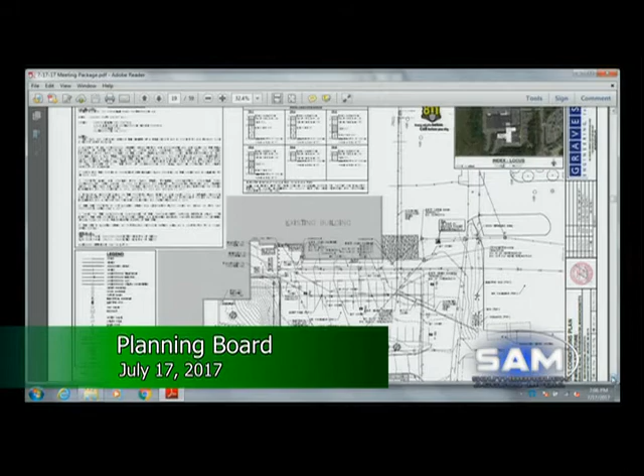As I mentioned at the first hearing, we were proposing a small increase of 1,320 square feet. Subtracting that, now we have an even lesser increase of 820 square feet on the site. Again, when looking at this in terms of stormwater, even for the 100-year storm, that's about 2/10 of a CFS. So it's a drop in the bucket. And the 2-year storm is almost zero. So this increase is pretty negligible. I think Fuss and O'Neill agrees with that.

Also, we looked at areas that we could add some landscaping to the site or habitat plantings, as was mentioned. There aren't really any wetland systems around the site that we can enhance. I didn't notice any invasive species that we can clean up. And we did not have any landscaping adjacent to the garage before because of its proximity to the structure itself. So we identified an area, currently just lawn, between where the parking garage will be and an employee parking lot, that we're going to plant some trees and shrubs. There's nothing there now really at all, so we'll be introducing some plantings there.

So those were the 2 plan changes. The final comment that Fuss and O'Neill had that was sort of outstanding was with regard to some existing lights that should be added to the photometric plan. These lights sit on an existing retaining wall on top of the wall and face down towards a parking lot to illuminate the face of the wall, so trucks don't back into it.

They're, I don't know how many watts they are. They're very small. They don't illuminate the sky at all. Frankly, I think they're going to be removed once this project starts anyway. It has no impact on the photometrics for the site or the project at all. So we don't feel that's really necessary to add that since they might be removed anyway.

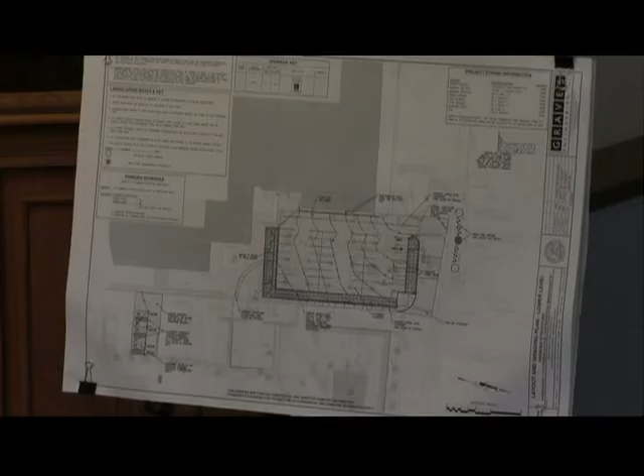So that's all the comments, that's the plan changes. If anyone would like me to go into any more detail about any of the changes or responses, I'd be happy to do so, or answer any more questions.

Great, thank you. I'll open it up to the board. Mr. Mills?

So I'm gonna go back to the lights, because I know it was a big discussion when we originally approved this new layout for the parking that's there. And I think it was my comment specifically, we didn't want it to light up and be very obvious from the road, and wanted it to remain discreet to where it is.

I'm not saying we have to have a whole plan, but I would like at least something that says the lighting plan will stay in effect to what it currently is. And if there's any change to that, then we'd have a say in the matter.

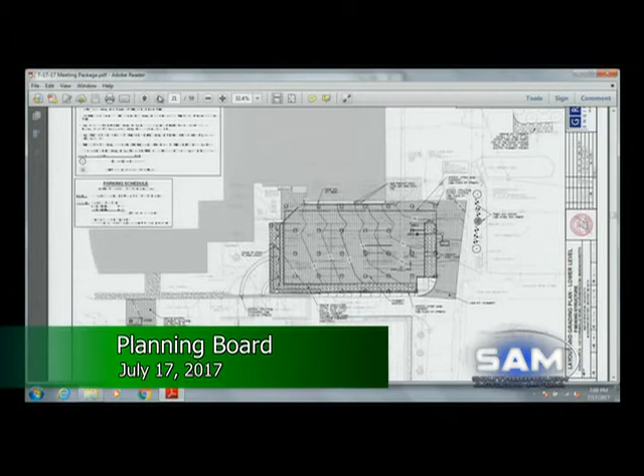Right, so we did submit a photometric plan with the initial submittal, so that represents the lighting created from this project, in addition to what's already there. In the last revision, we submitted cut sheets of what those fixtures look like. They're all LED lights now, down facing, both the lights for the poles on the upper deck and the lights under the roof on the lower deck. So we submitted all that information, and again, all that's reflected on the photometric plan. There's no spillage, there's no real major increases in lighting.

Again, the comment that Fuss and O'Neill had was just about those small landscape lighting-type fixtures, that those should be added, and I don't feel that's really gonna be impactful whatsoever.

No further questions. Mr. Jenks? Good evening. On the lighting, the luminaire data that you did give us seems to cover a whole bunch of different models. Where am I supposed to know which model the manufacturer's data refers to?

Good question. I could have been a little more helpful on that and highlighted the ones that were specified. They are specified on the lighting plan, the photometric plan, which model it is. I should have been a little more helpful for the board and highlighted which one at the height of the poles, but that information is all on the photometric plan that was submitted previously.

So the only way for us to know is go back to that plan and then get the numbers and then look it up on the manufacturer's data? Correct. I don't have the lighting plan with me tonight, but the model number is on the plan. I don't have that sheet with me tonight, though.

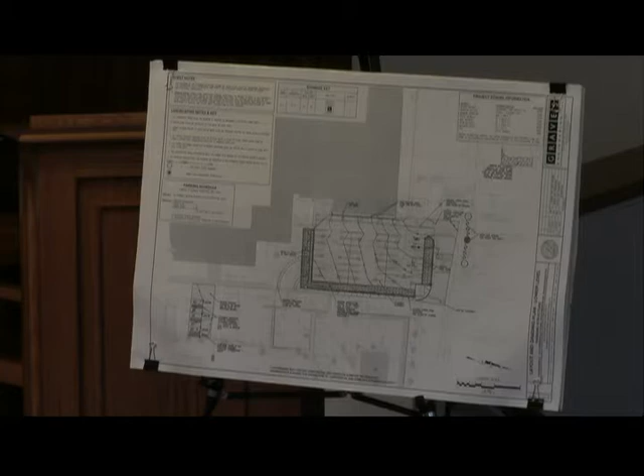Where does it go now? This area just drains to the lower parking lot right now and gets collected by that catch basin system. It'll all still go the same place, we're just diverting it around. We don't want it running into what's now going to be an enclosed area on the lower level. So the volume of water isn't going to change that's coming off this area? Yeah, no, there's no changes to that area.

But it's going - that drain is going to couple into a new drain that takes water off the top deck? No, not the top deck, just this area that's above and adjacent to the structure, this little area right here. So it doesn't tie into a new drain then? It ties into the existing drain system. Okay.

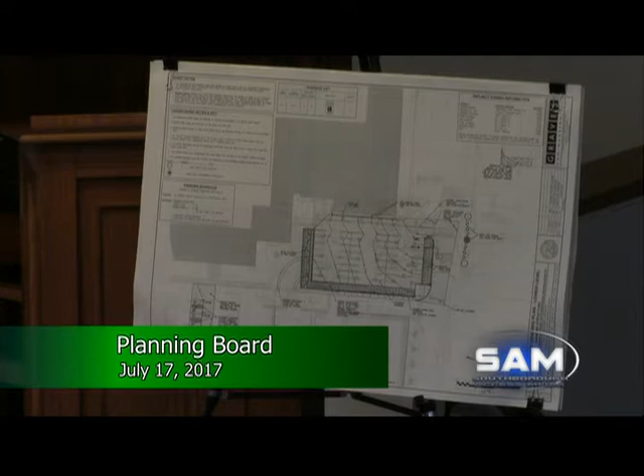Finding that extra 500 feet is a good thing, small, but I understand the constraints of the site. I'll add to that too - I fought for more areas, to be honest with you. There were some areas I thought maybe they could lose, and some of the attendees said no, we really need that, there's nothing there now, but when we get deliveries and stuff. So I really think that's the best that we can do.

No more questions. Thank you.

Mr. Stein: I was away on June 19th, but I did view the meeting and filed the Mullins paperwork, so I'm eligible to participate in the public hearing. My feeling at this point is I would feel more comfortable voting after a more thorough review of the photometrics. My recommendation would be at a subsequent meeting to bring materials to go over the photometrics more thoroughly, because the lights have been reviewed by your consultant, and they had no comments. It was part of the submission package. Those lights, if those are the issue, we'll add in that they'll be removed, because frankly I think they're going to anyway.

I wish I brought a picture of it. It's literally no bigger than an outdoor outlet fixture, with a tiny little light on it. Maybe I'm misunderstanding. Is it Fuss and O'Neill's contention that regarding the lights that were proposed to remain, that weren't in the original photometric plan, there's really no substantive change in the light impact of this project on the area?

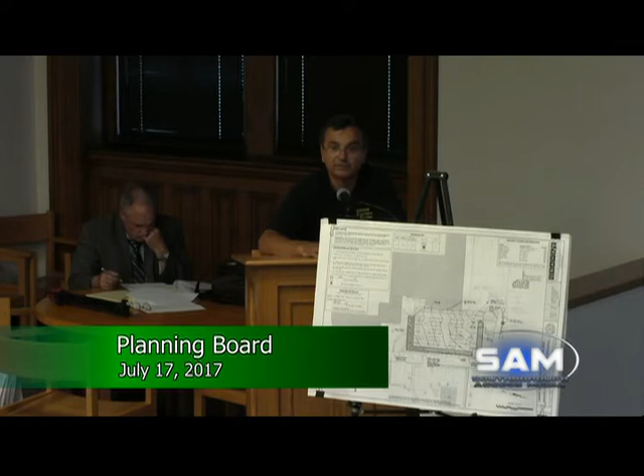So those are my two requests as a neighbor. I know you're spending a lot of money here, and we haven't done a lot of things over the years, and we've lived with the traffic, which is no big deal. It's part of living there. But the lighting is, and the view has changed definitely in the last 10 or 12 years. Could I get your name again? I'm sorry, George Harris. Okay, thank you. Thanks.

George, go back. Can somebody point on the map that area where we want more screening? It's not close to this parking garage. This might be the best view to get it here, so it's quarter of... Why don't you put it up so we all can see what we're talking about?

This is, it's right in this pattern. So here's the building here, right? This is the big building right under the arrow. Right under the arrow, so it's just along here. So where's your house actually? Right there. No, because they own all the property there. Well, they own, it flares out, and then there's a 70-foot lot for Paul Foster, and then I start.

So there's not a lot of wood. You gotta grab a microphone, gentlemen. I'm trying to see it. It's hard to see. This is 85, so it's here. This is 85, right? Yes. It's here, it's along this, there's your back parking lot where all the trucks and the vans and stuff park, and we're right here. We're like maybe 100 feet from the stone wall to the back, to my property.

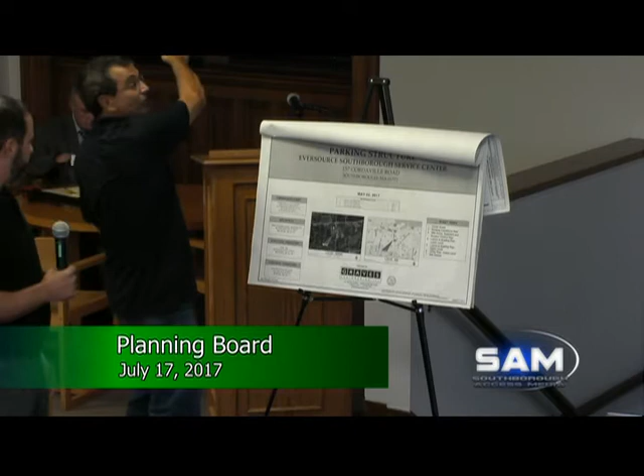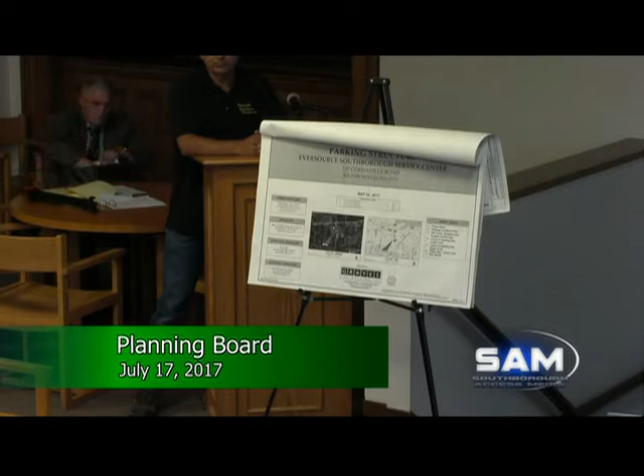Okay, now they know where you are. We're gonna try to get the GIS to zoom in on your lot, George, that way we can all see what we're talking about. This is exactly why we have public hearings, so that the neighbors can be aware of what's going on and provide their comments. And we know that the proponents want to be good neighbors. If there's an opportunity to take care of the neighbor, that's what we're going to do.

Mike, do you have the authority to agree to these type of things tonight? Certainly do not, no. To spend their money, no. Or any client's money, no.

The contractor for the project is here and interested in starting the work. I was just told there's a long-term plan, though I'm not sure of the timing, to replace all the existing sodium lights with LEDs throughout the site. I would think they'd want to do that anyway as part of their improvements program, but I can't comment on the timing.

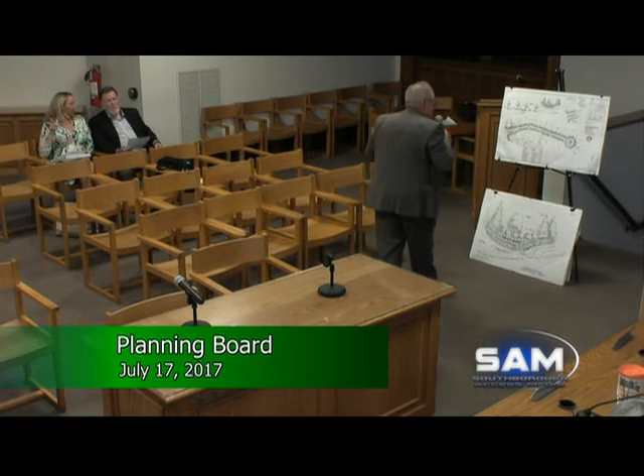For the record, my name is George Connors. I'm an attorney representing... hold on one second, George. Do we need...

Mr. Chairman, just as a point of clarity, because of the Mullin rule, and I missed a couple of meetings on this, I am unable to vote on this matter, so I am going to step away. Thank you, Mr. Mills. I'll ask the town planner to update us on the progress with this proposal. Karina?

Is he technically recused, or just, is Andy recused, or just not part of it? Not present. Did you already say when they continued? Yep. Okay, just the progress.

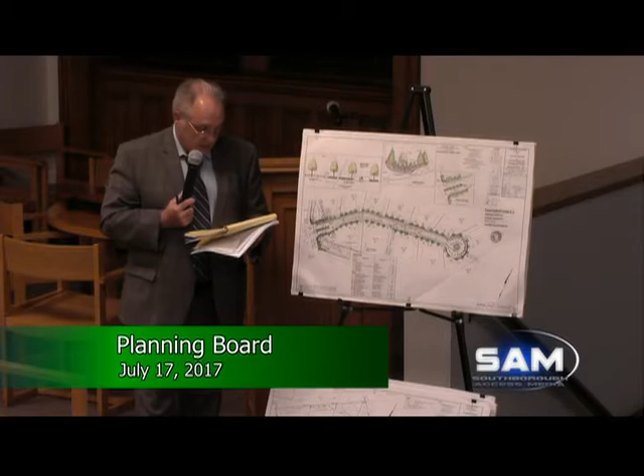We had indicated in a letter some of the LID components, highlighting those particular aspects. As I said at the last meeting, our drainage system acts as an LID in terms of infiltration. This is a large basin here, and we have an infiltration trench in this location, with water ending up going off in that direction. All of our stormwater is generally managed in this direction, ultimately flowing down along to this location and into this location. There was never any discharge onto an abutting property here—it infiltrated into the ground. There was an area in that location that had been mined out and filled with an odd, impervious material, which is why there was some ponding at that location over several years in the past.

That material will be removed. Underlying the site is sand and gravel, very deep, and it perks very well. So this basin, these infiltration trenches, and stormwater conveyances will infiltrate the entirety of the 100-year storm—all storms up to and including the 100-year storm.

The only thing we're still out of sync on is a road name. There were several road names we proposed to the developer, but he has not yet chosen one. I don't think that's a big issue—we'll come up with one that's acceptable.

So I can respond to questions, comments, and suggestions at this particular point.

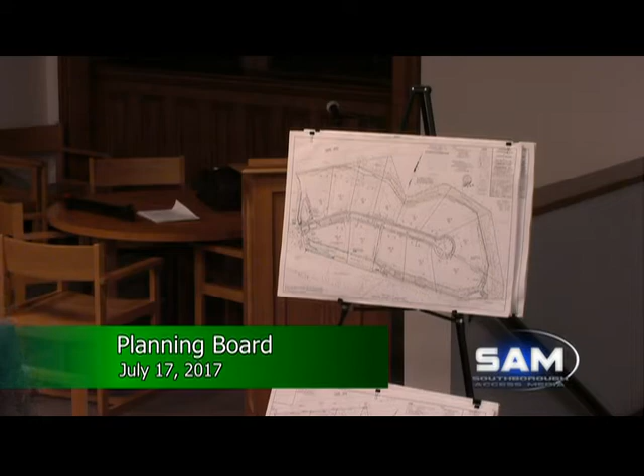Open it up to the board. Mr. Jenks? Yes.

Good evening, George. Who is, I haven't seen the actual application, but who is the owner of the property? The owner is the Johnson Campbell Realty Trust. They live in town, one of them lives in town.

And you are representing them, is that? I'm representing Habitat, the builder, the developer. And they're not represented in this at all? Habitat? No, the Johnson Trust.

Grab a microphone, go up to the... My name is Marshall Gould. I'm an attorney in Worcester, and I represent Johnson Campbell Realty Trust. We've been very aware of what they've been doing from the time of the purchase and sale agreement all the way through this time. Thank you.

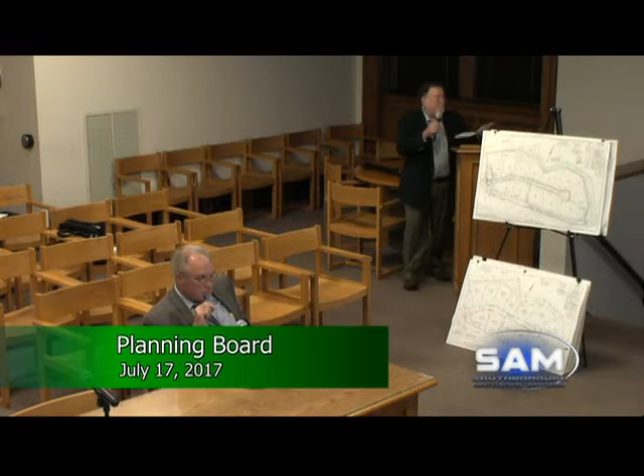The modern wonders of technology, I've lost my notes. Can you bounce ahead? Sure, to, Mr. Stein.

Mr. Connors, have you read the July 11th letter from the Open Space Commission? I have, yes, I have. Okay. Can you just take me through the difference between what the Open Space Commission is recommending and your current plan?

The open space is talking about, in not any particular order, the 81U, a lot would be set aside under one of the provisions of your subdivision code for a period of 3 years. That would be one of the larger lots in the site as an open space area. In addition, they talk about the plan meeting the 10%, but in some areas, predominantly, let me get it.

Along that line there, it's 10 feet wide, and along this line, along here, it's 10 feet wide, and their recommendation is, or they don't seem to think that has very much value, but I would point out that the entire subdivision, other than the north side where the road is, which is right there, Fisher Street, there's a railroad that runs along there, but all of that land surrounding it is open space, either by a trust, open space trust, or the MWRA. In terms of the open space, it's been reconfigured, and it follows a line.

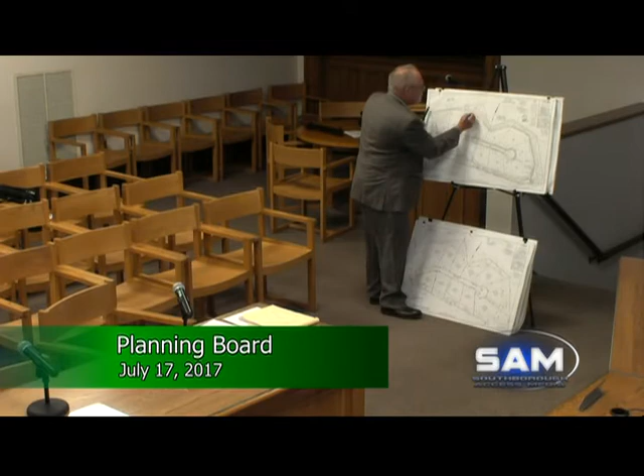I'll have to go up there. It's that yellow line that runs around the property. You can see it going along there. And everything on the outside of that is dedicated as open space in perpetuity. So your plan is essentially that the 10%, yes, is within a ring around the parcel.

Yes. Okay. Freddie, can you speak to the difference from your perspective, please? And it would help, Freddie, if you could actually grab the mic and go show us on the plan.

Hi, I'm Freddie Gillespie, the chair of the Open Space Preservation Commission. First, I have to say, the letter you have from July 11th was from the Open Space Preservation Commission after our meeting, not from me as an individual. That was a prior letter when we couldn't meet for the last meeting. So the letter for July 11th is an official, unanimously voted upon by the commission recommendation. This plan here came to us after our meeting, so we haven't seen it. So I really can't, as a representative of the commission, speak to it.

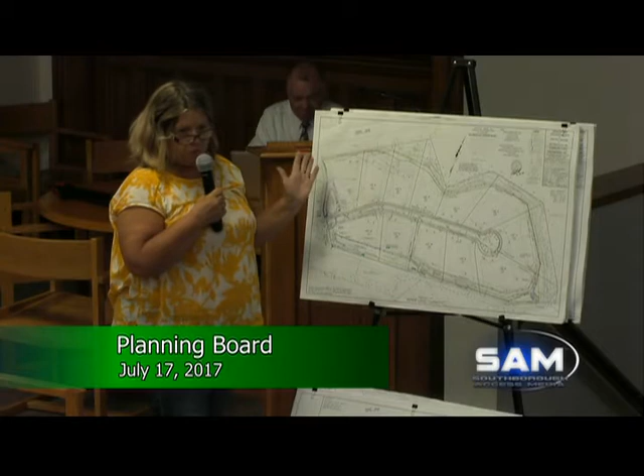So having said that, if I'm interpreting the plan correctly, are the 10-foot strips aligned or bordering other protected open space? Not necessarily. So here, I don't know how deep the upland is to the wetlands, but it's deep, so we didn't bother measuring it. There's a 25-foot no-touch to the wetlands, but along here...

And additionally, there's... Mr. Connors, where Freddie's indicating, what is that open space bordering? That open space along the bottom of that plan on the south side borders the MWRA. I'll tell you exactly - it is actually owned by the entity, the Department of Conservation and Recreation, Division of Water Supply Protection.

We did talk with them on several occasions, because when we were mapping the wetlands in that area, we had to get permission to go on their land to satisfy a conservation restriction. I did talk with MWRA relative to this, and they understood this project is coming in. All the land to the south is what I just said, and the land to the upper right-hand corner, other than where the railroad is, is an open space trust - the Trustees of Reservations. So essentially, other than the railroad and an abutter to the west, the entire site is surrounded by open space.

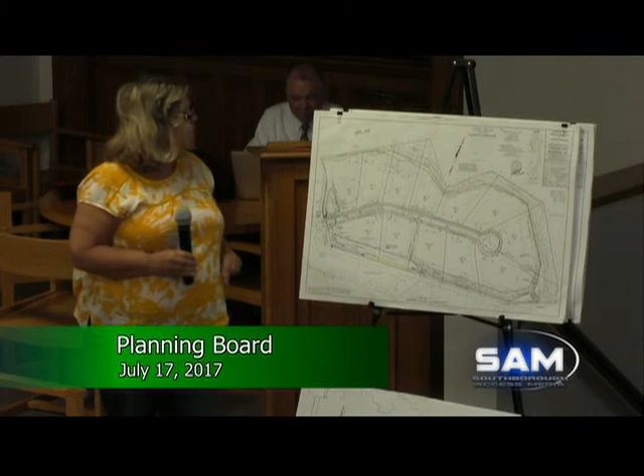Mr. Connors, my one recommendation, if this gets continued further, would be to please try to collaborate with the Open Space Commission so we can have this hashed out before a planning board meeting. I don't think it's necessary to go through this. I understand this has gone on for a long time - it actually started in the very beginning when we talked about a cluster subdivision there, and we met with open space in about a 1.5-hour meeting with the client. The client could not seem to understand any of this, so we went to the as-of-right option.

Under 214-14, open space can be either a separate parcel, A or B - certain portions of each lot collectively equal to 10% of the gross open space. So we do meet that. We've added it in. There is no definition in here that says it can't be wetlands. We've changed it to open space that is 10% uplands.

But this is a really high priority area. I understand that, and it's conservation and high priority open space. Mr. Connors, you completely know open space and land conservation is extremely important to the residents of Southborough. As a planning board member, I'm asking you to please collaborate with the Open Space Commission so we don't have unnecessary differences that have to get aired out during these hearings, please. I would love to do that. We tried that. I just don't think it's gonna happen. Thanks, Don.

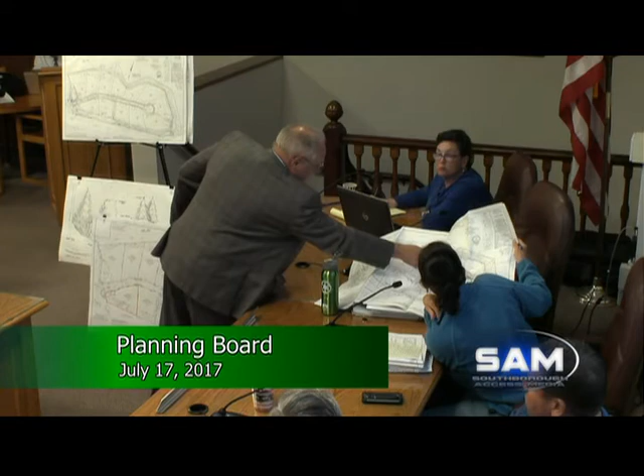And that was discussed several times. It's just a scrivener's error. We can correct that. I'm very sorry about that. But if you look at the land conveyance plan that shows the mathematics of the easement, that is the parcel that has the jurisdictional and legal aspects of the open space.

So the mathematics is to the yellow line and not to the line pointed out on the plans? Say that once more. So it's the same arrow on page 4 that has the lot area tabulation. So is the open space amount figured to where it shows this arrow, or is it figured to that yellow line? It's to this particular line, which mimics that yellow line in this drawing.

This is the conveyance drawing. As you require that the plans and deeds would have the open space easements in the deed, it would be from this plan here that we would draw those legal descriptions. There's a slight error with that arrow. I'm sorry about that.

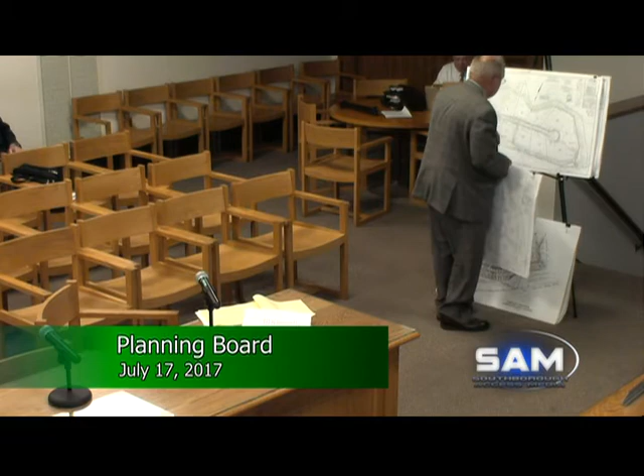So the open space follows the 25-foot no-touch? It's the same? It varies. It varies a fair amount in different areas.

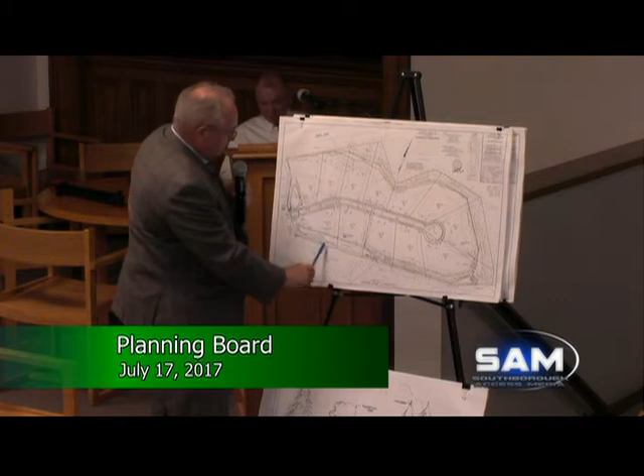You talked about the minimization of grading and clearing of existing woodlands - the limit of work has been designed to remain entirely within the pre-existing active agricultural field. What is the pre-existing active agricultural field? It is virtually the entire site other than the wetlands. If you look at the plan, along the edge here is a curvilinear bumpy line that goes along - that's the property line where the canopy is on the MWRA, DCR land. Along the top of the site there's a bit of tree intrusion, but this is field from roughly the property line to just a few feet off it. The field goes up to this location where it's down to the bottom of a slope and into the wetlands. It follows along near the top of the slope as it falls into the wetlands. So from there all the way over to the DCR property line, it is open, and then it's open up onto the end here at the property - that's about 70 feet or so.

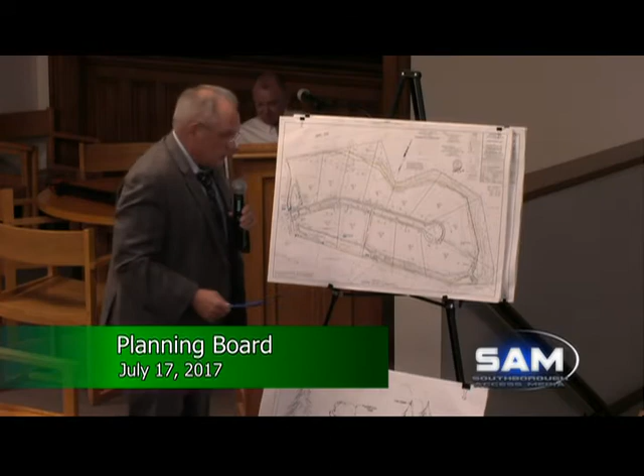So the entirety of the development footprint is in that agricultural field - all the houses, all the yards, everything. And that field all around the subdivision will remain classified as agricultural? No, no - there'll be houses on all of those lots. If you look at the setback line on that plan, from that point down to that point there will be house, yard, and driveway. It's a little bigger on that lot, it won't take it all up, but the actual building footprints are fairly constrained with the setbacks and side yards on all of these.

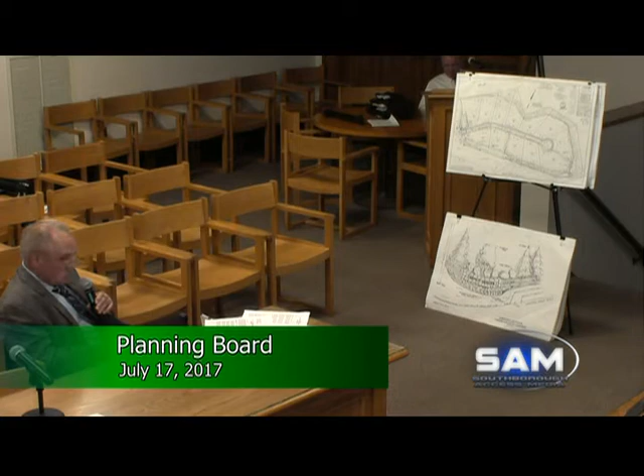Now I understood that - I thought the area you were describing was the area outside the subdivision, when you were talking about the agricultural land area. Oh no, this is agricultural land, it's in agricultural use now - they hay it a couple times a year, I guess. So it's technically an agricultural field that we're converting to a residential subdivision. That's the point - but we're not cutting down trees to do that, because there aren't any. Okay.

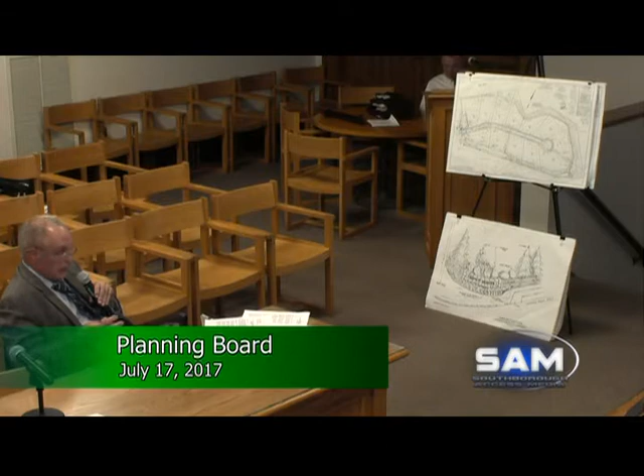You talk about the calculations of impervious materials. Is that in the report that was done for conservation? Yes. Is that where they are? Yes, and Fuss and O'Neill's seen those as well. Each lot has a particular amount dedicated in the model, a standard model, as to what the impervious surfaces would be.

I've been looking for it and can't find it right now, but you talked about the use of some troughs. Troughs, swales, yeah. What happens in the lower area, that area there is a trough. Basically it's a channel, lower in the middle, a wide channel that will convey water along it and infiltrate it into the ground. Again, because it's sand and gravel there, very deep, well-drained. Our theory is that area was mined out for brick mortar when they built the MWRA tunnel. There is also a swale there, and another swale that I think you could call troughs. Perhaps Vito named them troughs.

In the northwest section where you've got that strange fill, have you done testing for septic systems there? We did, and if you look at the test there, those are the locations we found with the decent sand and gravel. That area was lower, as we said, probably mined out, had been refilled with all sorts of material from construction. It's very hard, very impervious, a loam-type material with railroad ties, concrete ties, bottles and lunch trash, all sorts of debris in an area about 3,000 or 4,000 square feet. Then it was mowed as grass and became a highly productive loam-type material. We couldn't even dig into it with our hand augers, we had to get a backhoe out there and dig it out. But that material will be removed from the site and refilled with decent sand and gravel to approximate the entire site, which is a sand and gravel deposit.

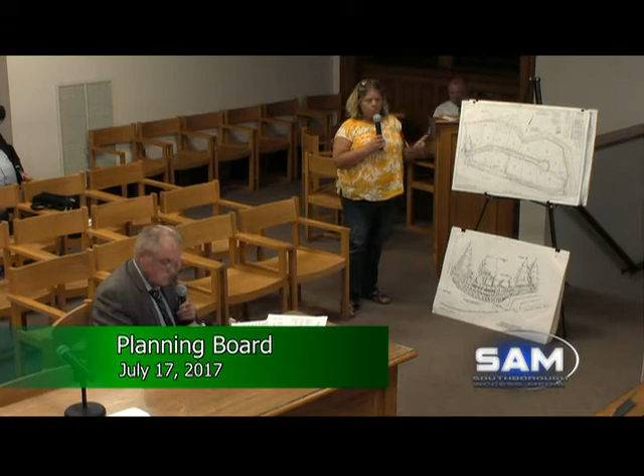We're taking the position that it has no value and is more headache, because you can choose A or B, and this has no additional open space value compared to what will be there without this band, given that all of this is going to be open space, not touched because of the riverfront area and ConCom. Most of it is the 25-foot no-touch to the wetlands. These additional 10-foot strips with stormwater coming down to them, swales, going right to the open space, the fact that you're not going to be able to monitor them, it's a difficult, challenging site because it's agricultural land and hay. If you make it open space, there's nothing there to say this is shrubs or trees, it's going to be grass and lawn with fertilizer and chemicals.

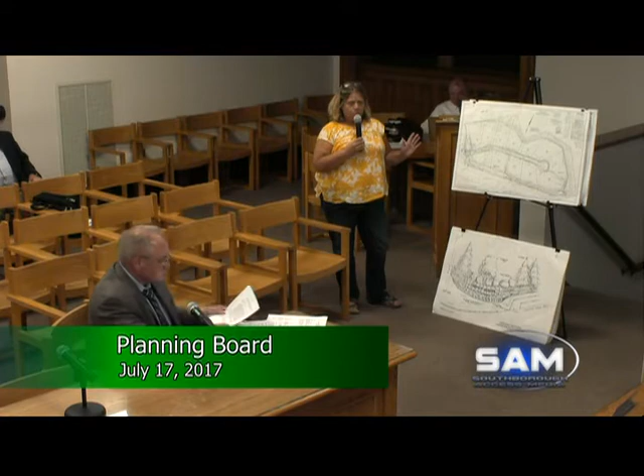So we're not saying it couldn't meet the regulations. We're just saying you have the other option, and if it's not going to have meaningful open space, go with the other option: 1.574 acres of upland as a park for 3 years. We have never made that recommendation before. However, we spent $60,000 to $70,000 on this deed research project, and when you know better, you do better. We decided that 3 years of open space value, which is allowable under your choice, has more value than no value in perpetuity that you can't manage, monitor, or enforce.

Thank you. No more questions? George, I guess hypothetically, assuming that if this project gets approved in August or September of this year, when would the construction begin?

I do not know. I do know that we discussed with the fire chief that building permits would not be an issue with him, but certificate of occupancy would be, until the water line is run in its entirety through the site.

And who's going to pay for that water line? The developer, yes. And that'll start up by the railroad bridge? Yes, and come right down the road straight into the site. Yes, the developer will pay for that.

And was that discussed with DPW and the fire chief, including the repairs to the road? Imagine there won't be much left of the road. No, nothing left of the road. We've discussed that. We're gonna put a tight binder of a certain dimension, a little bit more than the regulation requires, because that's what Karen wants. And that will sit for a year, and then we'll put the top on after that.

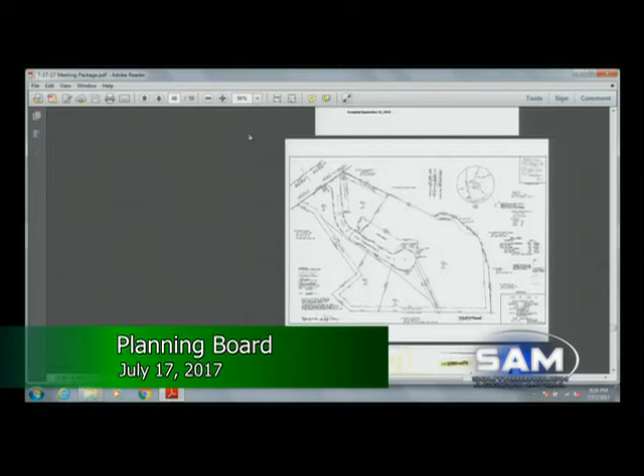Mr. Jenks asked about the 10-foot strips along the property, wondering what they were for besides open space. It was explained that it's a connection to allow people to get to the open space if they want, another way to access it. Also, there's a state trail running along that area that they plan to let residents utilize to walk down to the rest of their property.

No questions from Mr. Stein. Mrs. Luttrell?

Mrs. Luttrell suggested additional language be added stating that the open space shall remain continuously undisturbed in its natural condition. It was noted that similar restriction language already exists: no building, residential dwelling, structure, parking lot, or other improvement requiring construction shall be placed on the property other than unpaved footpaths and trails, and improvements necessary to assure safe passage, prevent erosion, or protect the natural habitat. However, this is different from saying it should remain continuously undisturbed, since some harvesting might be necessary, so an exception should be noted while clarifying the intent of the open space use.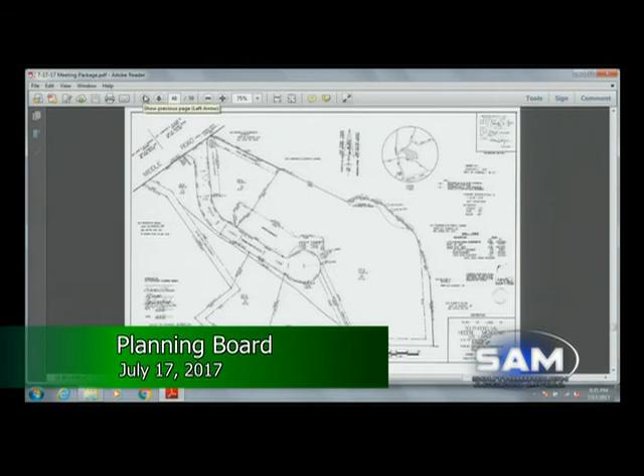This subdivision was approved. I've talked to Aldo about this. We agreed to disagree, although I don't disagree that one of the options available is a modification of a subdivision. But he said I could come in and talk to the planning board about my thoughts, as I explained them to him. So I'd like to do that as a courtesy to the board and to Rebecca.

Rebecca and Ken have lived in town since 1999. Last year they started looking for a different home, and they wanted to stay in the town of Southborough. They have both been involved in the community.

Ken is Rebecca's husband, he's a lieutenant on the fire department in town. Having been here for close to 20 years, Rebecca's gotten involved too. She was on the Conservation Commission from 2011 to 2013, on the Town Ladder Truck Committee from 2008 to 2011, and before that on the Town Kinder Group for 8 years, from 2001 to 2008.

At the time they were looking, about a year ago, for property in Southborough, they wanted more land than they currently had. Curiously, they live just south of this development, on the other side of the town-owned property shown at the very bottom of the plan up there. So they saw this lot, and it was available for sale.

They had looked at other properties in town, but they saw this one. Rebecca, who works as a paralegal at a law firm, Cutler and Walensky, approached Attorney Walensky, who does real estate work, and told him they'd found this lot and were looking at it. They wanted to buy it - it was more than they wanted to spend, but they would stretch because she was hoping it might be enough to have 2 lots.

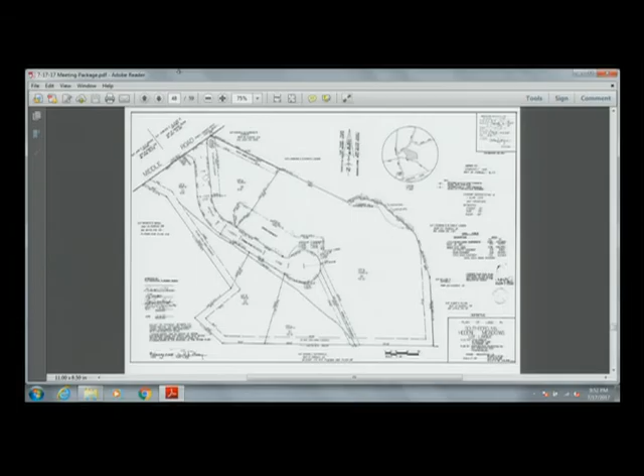That's the same plan I'm looking at here, but I don't see where their house or driveway is. We can show you that. Sure, but assuming those requirements are all met - right, and the thing is we don't want to build any new road or any new curb cuts. We want to keep it exactly as it looks now. Just in the very back there will be one other house, on a 1.13 acre lot, which is consistent with the size of the other lots in the subdivision.

Well, I'll hear from the rest of the board on their thoughts on this, but I'll share my thoughts before we get through tonight. Mr. Stein?

Has there been any contact with Li Gao and Yang Zhang on this matter? They're an abutting owner. We had a brief conversation because they approached us for a couple things. One, they wanted to know why we were digging, so we explained we were perking and considering. Two, we were discussing mow lines. There's a slight communication barrier - not a lot of English being spoken - but we tried to explain what we were looking at doing. We haven't formally approached them to ask if it would bother them.